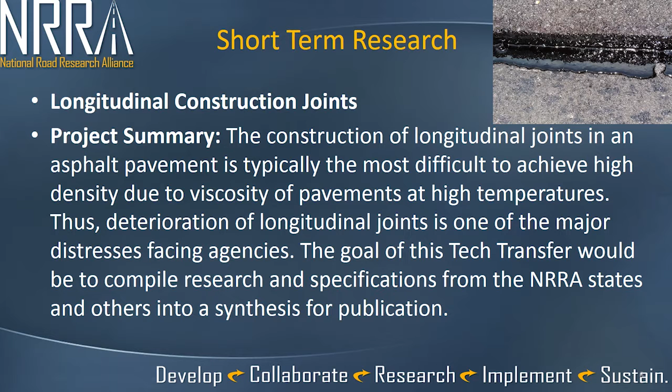So for us, this is really truly, let's just share information amongst the states. There's no need to really build extra test cells to prove this out. So we're working on that document. We're trying to capture a couple of those innovative things as we speak right now. So I would say by the end of the summer, you should see this posted online as a usable document. And then as part of the team charges, we'll have to figure out what's the next step once the document's ready. The other topic is tack coats.

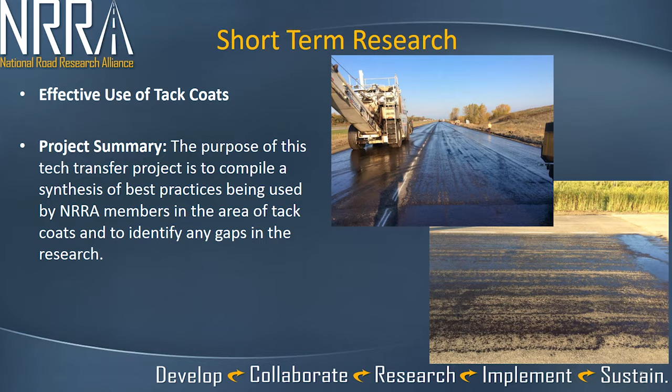Everybody's done something with tack coats to try and improve them. I know in Wisconsin we've worked on them too. I'm going to reference Illinois again. I inherited, luckily, a person that used to work for IDOT to be my HMA supervisor, Steve Hateful. So I can take a lot of their innovative ideas and try to apply them in Wisconsin. But we're also doing that with the NRRA. Let's survey what states are doing to get better tack out there. Are there specific products they're using that are working better? Are there certain application methods? What's going on here? So again, let's synthesize, let's gather all this information, put it together in a report, and share it.

So this is not an NRRA section, but I have to highlight this because it kind of tells the story of how we chose what we were going to do as part of the build out at the NRRA.

Now, how many of you were here last year? Okay, so that means over half the room, this is your first time here. So I will go through a little bit of a history lesson. For those of you who were here last year, tune out the next 2 or 3 slides. I apologize. But we gotta get everybody on the same page.

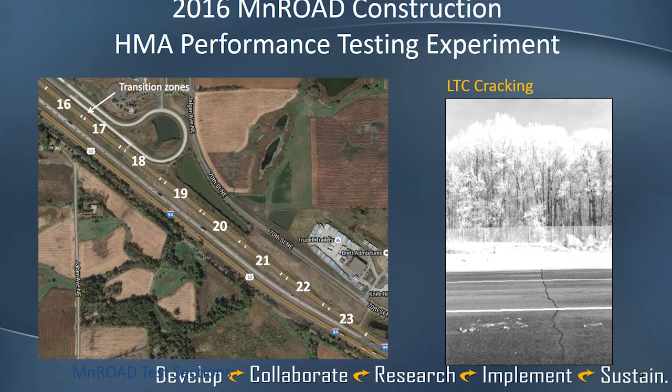So with the MnROAD and NCAT research projects, they partnered together and put some cells down there that were designed to look at performance testing of asphalt mixes. We were trying to figure out what performance test validated or matched what happened in the field. We built cells to look at those things and designed them to crack. And the reason I'm telling you this is what we had to do with the NRRA Flex group was to do something different than what we had already built out here at MnROAD.

So, next slide please. We had put all these mixes down that were designed to either crack or resist cracking, and we did a whole ton of torture tests. If you can name a torture test, we probably played with it as part of this research project. So it's kind of a parallel study that we're working on right now through NCAT and MnROAD. But I wanted to highlight that because we're already doing performance testing and cracking type studies with this study. So when we were doing the NRRA Flex team, it had to be something different. We weren't going to repeat the same research project at MnROAD.

So what did we do for long-term research? With all the states talking together and the associate members, we've heard many different ways to put overlays down. A lot of our DOT dollars are stretched. You're not seeing as much new construction anymore. You're seeing a lot of overlays, overlays of old concrete, overlays of badly damaged asphalt roads, overlays on stuff that we really shouldn't be overlaying. And there's many different thoughts out there as to how to do this.

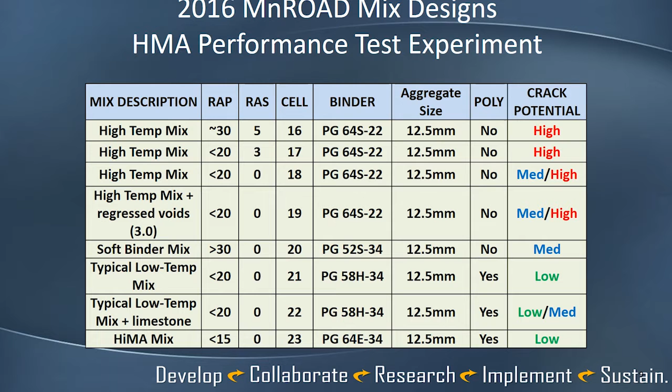So the focus of this first long-term study is, let's look at all these different overlay methods and see how they really perform. Is a thicker overlay better than a thinner overlay with a high polymer mix? Look at these different variables in one test section and see how they perform. What kind of life curves can we get? And that's actually something that agencies were really interested in. Is an overlay truly going to last 8 years, 10 years, 12 years? And what's the difference if you change thickness or change the material you're using? So that was really the focus of this long-term study here, looking at these overlays.

The other part of it is, we've heard of a lot of different ways of trying to enhance compaction and get more durable mixes out there. And we wanted to try a couple of them side by side, and this is a great research facility to do it at. So we have all these different overlay types out here, but we've also got a little bit into different types of more durable mixes, and I'll get into it in the next slides.

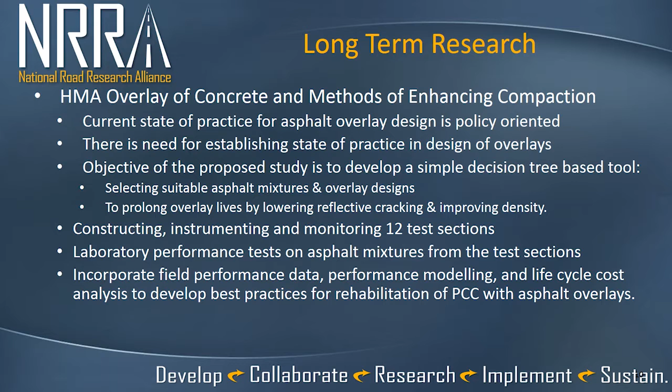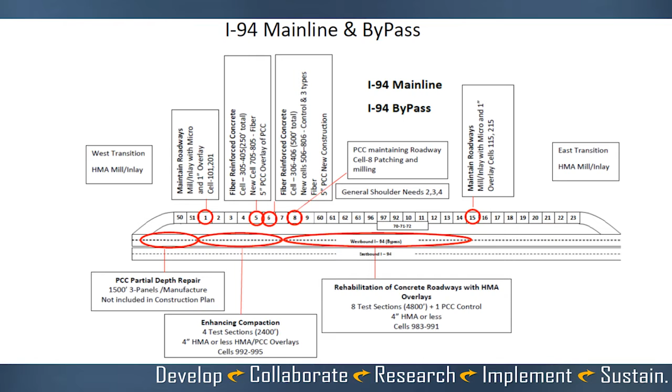Next slide. So I'm assuming almost everybody came from the south today to get here. Did anybody drive from the north to the south to get here? Okay, unfortunately for you guys, you did not drive over the test cells. Everybody else did, because we were on the bypass, I guess is what you call it, Ben, right? This morning. So the cells are the big red oval there. That's where we are. So if you were driving on what I would describe as some rough concrete, and then all of a sudden you hit these asphalt overlays, these were the cells that we built here last year as part of this study. So that gives you a little bit of a lay of the land. Next slide, please.

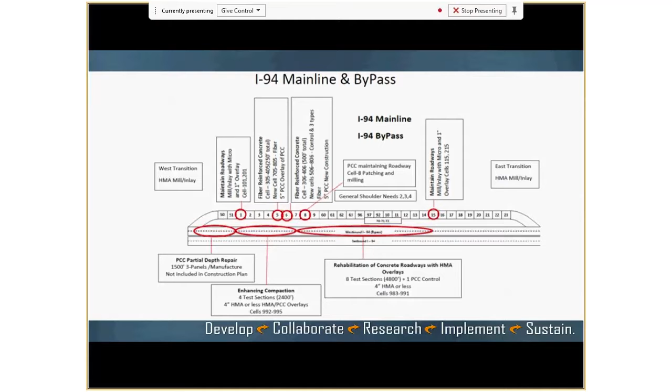And I apologize, there's a lot of information here in very small cells, but I'm going to kind of walk us through where we are. And if you have your program and you go right to the middle, it lays out what everything is out there at MnROAD. So as I reference the numbers, you can kind of see where we are. I didn't realize you guys were going to have a cheat sheet out there, but this makes my life easier, so I appreciate it. What we're doing out there is looking at different thickness overlays in the first couple cells.

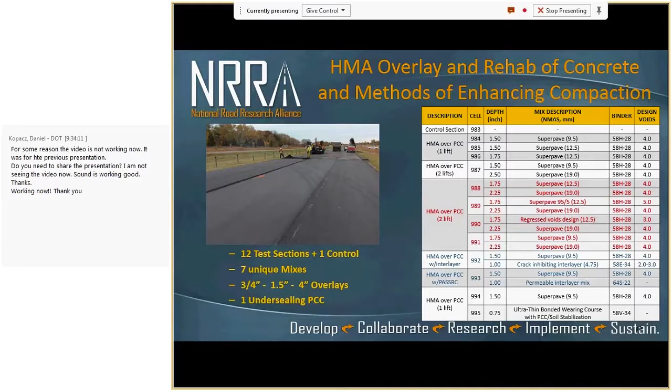So you've got 983 as control, 984 is just a 9.5 millimeter overlay, 985 is a 12.5 millimeter overlay. So what's the difference in performance with the 9.5 millimeter mix versus the 12.5 millimeter mix? 986 is a little thicker version of that 12.5 millimeter overlay. And what you can truly check out by looking at these cells is how much does thickness impact performance in trying to resist that cracking?

Because these concrete cells, they were past their useful life. There was some damage. The joints had some rough stuff there. So that's what's going on there. 987, we're getting a little thicker. We're putting 2 lifts down, so we're getting to that 4-inch thickness with a 9.5 millimeter wearing surface out there. So just to see, is that 9.5 millimeter surface going to give us something?

The cells highlighted here in red, 988, 989, 990, and 991, those are the enhanced compaction cells. So what we're looking at there is different methods to see how they help performance. 988 is kind of a standard, cookie cutter Midwest overlay on concrete, 4 inches with a 12.5 millimeter wearing surface. That's kind of our bread and butter in Wisconsin, and I'm pretty sure in Minnesota you guys are the same. If it's not 12.5, it's a 9.5 in that type of style.

989 is trying the Indiana Superpave 5. How does that compare to our standard mixes? So we put a Superpave 5 out there. 990 is a regressed air void mix. So we went from a standard mix design, 4% air void target, added asphalt back in until we got to 3% air void. It's something that we've done in Wisconsin now for a year and a half to up our asphalt contents, and it has added anywhere from 0.3 to 0.5% more asphalt in our mixes.

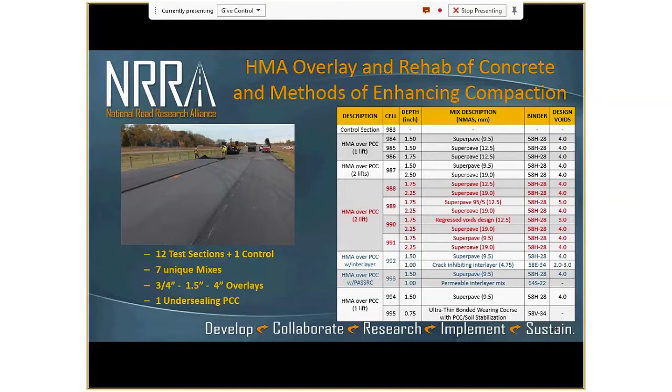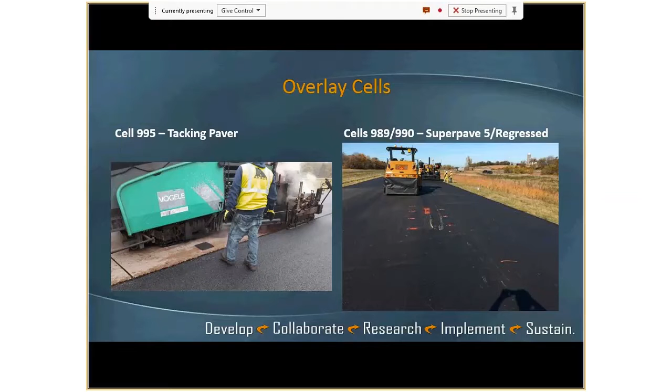Next slide, please. The other long-term study, I have the wrong title on here. Oh no, this is still the right one. Sorry, I'm getting ahead of myself. So what are we collecting out here? All the different distresses that MnDOT's been collecting. They looked at the joints, there were thermocouples out there. We have FWD, IRI, loading, distress evaluation. They're collecting all that data.

And the state members said that, okay, we understand there was a separate cracking study, but in order to truly do justice to what we're doing here, we need to look at that as well. So all the states volunteered to do a different type of performance test. The Hamburg wheel, the I-FIT, the MIST, TSRs, DCTs, SCBs, all these different test procedures that are out there to model cracking and pavement distress. States have volunteered to run them. So teaser, workshop session 3 this afternoon. We'll be talking about some of the initial results we have from those different studies.

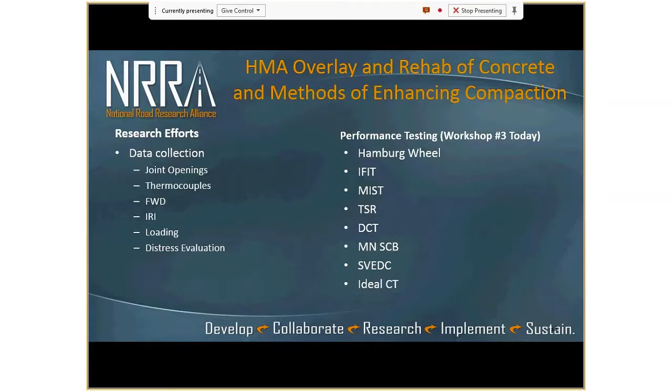The second long-term study, and I'm going to say this kind of goes as a little bit of a joint study here with the preservation group, is looking at cold central plant recycling. Those of you who are involved with NCAT, you know they've built cells there. Anybody that has worked with Virginia DOT, they are all in on cold central plant and cold in-place recycling. Virginia is doing it on the interstates already. So they've bought into it, and we in Wisconsin have actually built 5 or 6 projects with this cold recycling.

And how's my mic here? Did I turn it off accidentally? Dead battery. Oh, okay. Do you have another battery? Let's try this one. Is the mic on the computer picking me up, or is it through this? Talk amongst yourselves. You're gonna have to talk real loud into that one. Is this better? Can you guys hear me? Probably not. All right. Is that better? I'm gonna hold it. Okay. Test, test. We're good? A little louder? Got no volume control. Okay, I'll put it in my mouth and see if it catches breathing well. There we go. I think we're good there, Bob.

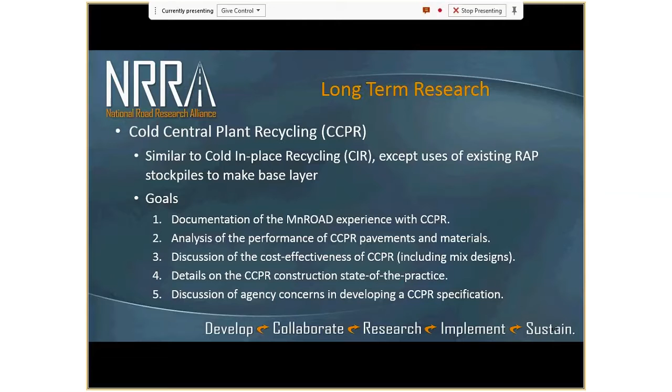So we've got 4 cells out there on the low volume road. And what we did with them is do a cold central plant, 4 inches of it put out there. The first 2 cells just got a double chip seal. The only difference between the cells is one used a foamed asphalt and the other one used an emulsified asphalt. The other cells, 135 and 235, got a 1.5 inch overlay of HMA. And they've been running traffic on them with loaded trucks.

So the goal is really, can a double chip seal on a cold in-place or cold central plant recycled mix be durable enough for what you would do for a low traffic township, county, municipal road and provide performance? Because if it can, locals can save a lot of money rehabilitating their roads this way without having to do reconstructs and can start stretching budgets.

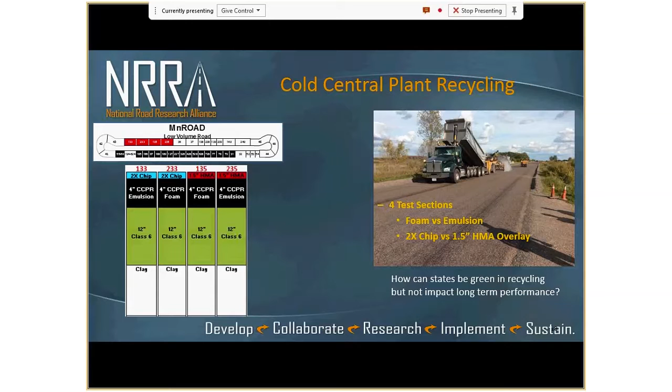Next slide. So here's some construction shots. Cell 133, 233. So those are the double chip applications with the fog seal out there. So we'll be able to walk those this afternoon, I believe. So take a look at them.

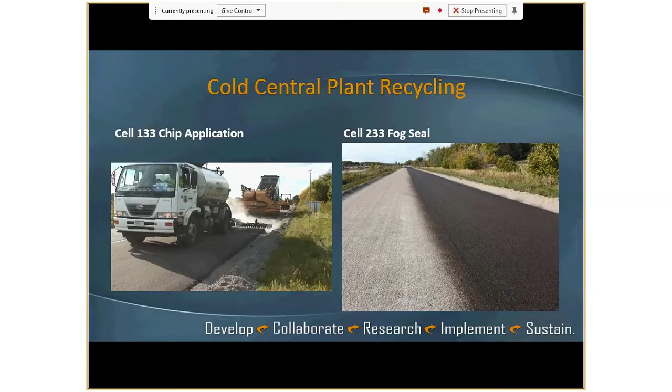Next slide, please. And here's some updates. The fun thing I like about doing this stuff at MnROAD is I can make mistakes here and get away with them, where I don't have to answer to politicians and taxpayers. And that was actually the concept here: let's push the envelope here. Let's see how far we can go.

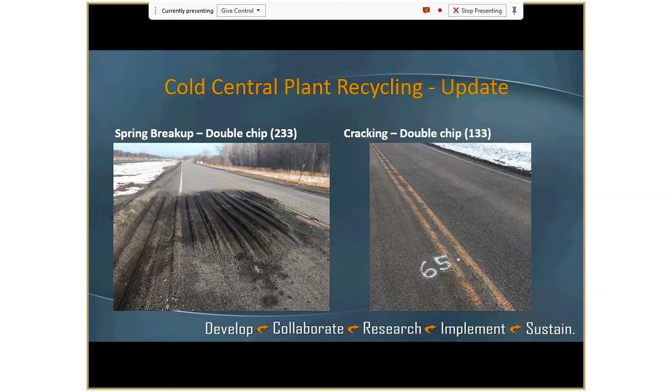We did have some winter, and I agree, Glenn, we didn't have a spring. It went from winter straight to summer. So when you guys got 15 inches, we got 31 inches up in Green Bay and had barn roofs collapsing in April.

So it'll be interesting to see how this performs through time. And then as we're done with the mixture evaluation with the different torture tests, how those are going to perform and relate to what we see for performance in these cells. So that's all my slides.

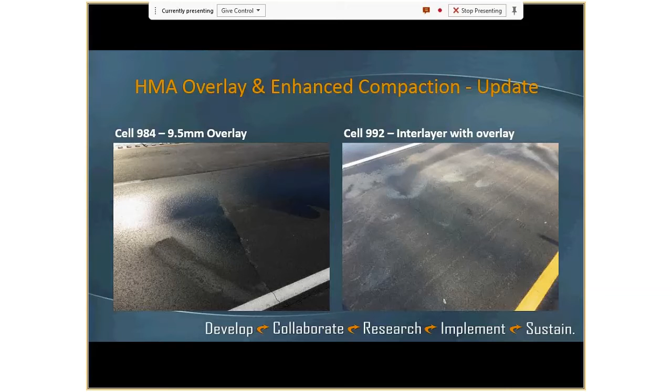Are there any questions on anything we're doing here? Any term that I used that didn't make sense or someone didn't understand? Because I tend to use asphalt terms like they're common sense because I've been doing it for too many years. Any questions on anything in general?

Could you only comment, when I did this study, it was a report that we had, that we looked at a lot of different materials, and one of which developed the best practices for tack coat and longitudinal joints in flexible pavement. So maybe you want to look into that in the future as a reference for something that you publish in your materials.

So I heard it was that FHWA did a study on tack coats and longitudinal joints, and yes, you're correct, because I know that the workshops on tack coats came through Wisconsin, and we used it to implement some spec changes, and it is to highlight really what we're doing in the group, so we'll make sure that that's something that was referenced. I think it might have been in the study. So, yeah, we did catch on that. Thank you. Any other questions?

Otherwise, I'm 6 minutes early, which generally is not a problem if you're the last speaker before happy hour, not early in the morning. So. All right, well, thank you.